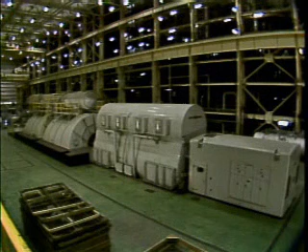This is the inside of a boiler furnace. Here, water in the tubes lining the walls of the furnace absorbs heat from burning fuel. The water is boiled, producing steam that drives a turbine and also provides heat for other systems in the plant.

Water circulation in a boiler is necessary for two reasons. First, it provides a constant supply of water to be turned into steam. And secondly, it carries the intense heat of the boiler furnace away from the boiler tubes, preventing the overheating and rupturing of the tubes. In a typical drum-type boiler, the water flow path includes an economizer, the boiler drum, downcomers, headers, and the boiler tubes.

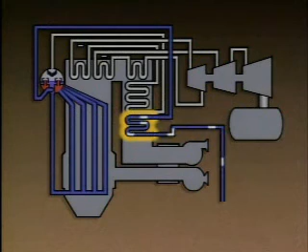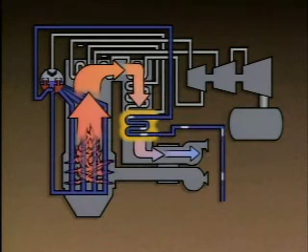The water that is supplied to a boiler is called feed water. The first component that the feed water passes through is the economizer. The economizer uses heat from combustion gases that would otherwise flow out of the stack to heat the feed water. Heating the feed water means that less fuel has to be burned in the furnace to convert the water into steam. In this boiler, the heated feed water flows from the economizer and enters the bottom part of the boiler drum through the feed water inlet.

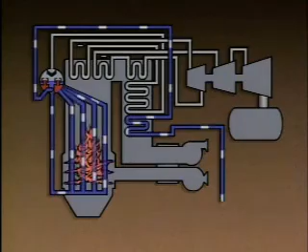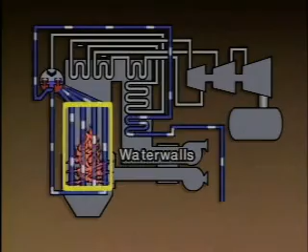The water continually circulates within the boiler through the downcomers, the lower headers, and the boiler tubes. A boiler typically has 2 or more downcomers and 2 or more headers. However, for clarity, this illustration shows only one of each. The lower headers supply water to the bottoms of the boiler tubes. The boiler tubes, which line the inside walls of the boiler furnace, are commonly called water walls. The water walls are exposed to the heat produced by burning fuel.

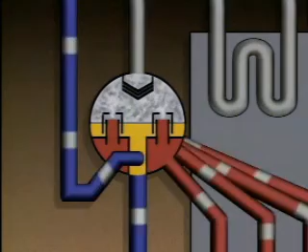As water flows up through the water walls, heat turns some of the water into steam. The mixture of water and steam rises until it enters the boiler drum, where it's separated into water and steam. The steam rises to the top of the drum, and the water remains in the bottom. The water is then available to recirculate through the boiler. The flow of water through some boilers occurs by means of natural circulation.

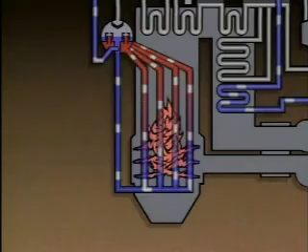The key to understanding natural circulation is the fact that cold water is heavier or denser than hot water or steam. In a boiler, the mixture of water and steam in the water walls is hotter than the water flowing from the drum through the downcomers. This is because the water walls are heated by the burning fuel in the boiler furnace. As the mixture of water and steam rises, cooler water from the downcomers flows into the lower headers and then into the water walls. The cooler water is also heated and rises, creating a self-sustaining flow through the water side of the boiler.

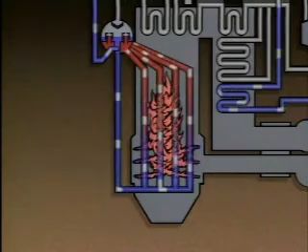Natural circulation of water in a boiler is affected by 2 factors. They are the amount of heat produced in the boiler furnace and the pressure at which the boiler operates. For example, raising the temperature in the boiler furnace increases natural water circulation because it results in a greater temperature difference between the water walls and the downcomers. Increasing the second factor, pressure, has a negative effect on natural circulation because as pressure increases, the density difference between water and steam decreases.

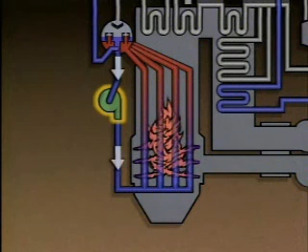In some boilers, boiler water circulation pumps are used to increase circulation. Circulation that uses pumps is often referred to as controlled circulation. The pumps force the cooler water from the drum through the downcomers, into the lower headers, and up through the water walls. The increase in flow over natural circulation provided by the pumps allows more heat to be absorbed by the water. As a result, controlled circulation boilers can produce more steam for a given size boiler.

A boiler drum has 2 main functions. It receives heated feed water to make up for water that's converted to steam and flows out of the boiler. It also collects the steam that's produced in the water walls. This is a simplified cutaway view of a typical boiler drum. The bottom part of the drum contains water to be circulated back through the boiler. The top part of the drum is used to collect steam. Heated feed water is fed into the drum through a distribution pipe. The drum is usually kept about half full of water.

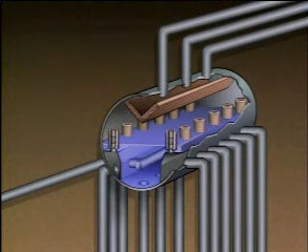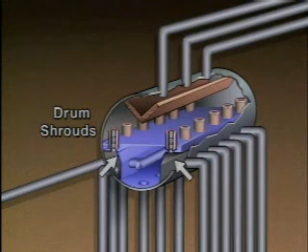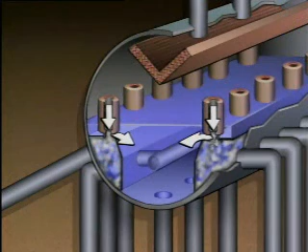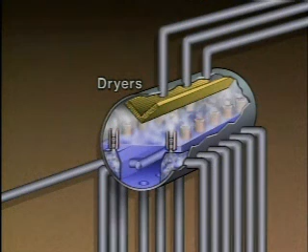In this example, the mixture of water and steam that returns to the drum from the water walls is directed against baffles called drum shrouds that run the length of the drum. The shrouds direct the mixture of water and steam into moisture separators, which are located at the top of the shrouds. The moisture separators separate the water from the steam. The water falls into the lower part of the drum, where it mixes with the feed water. The steam rises into the upper part of the drum. The steam could still have some water mixed in with it. So in this example, it is sent through dryers, which are located in the top of the drum. The dryers remove as much water as possible before the steam leaves the drum.

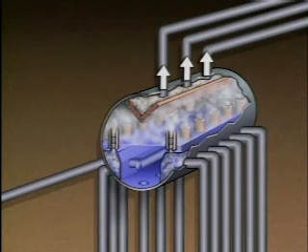This is important because water that flows out of the drum with the steam could damage downstream components. The steam is discharged from the drum through steam outlet pipes. Between the time that steam leaves the boiler drum and the time that it enters the condenser, it is acted on by components in the steam flow path.

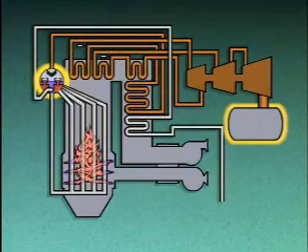To understand what these components do, you need a working knowledge of three basic concepts that are associated with the production and use of steam. They are boiling, saturation temperature, and superheat. Boiling is the process of converting water into steam. For any given pressure, there is a corresponding temperature at which water boils. The temperature at which water will boil at a given pressure is known as its saturation temperature.

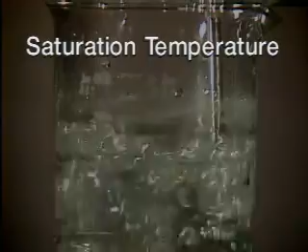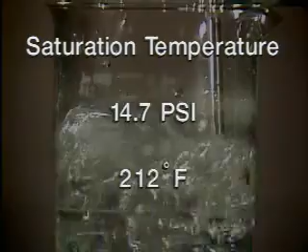As pressure increases, saturation temperature also increases. For example, at sea level, atmospheric pressure is 14.7 pounds per square inch. At that pressure, the saturation temperature of water is 212 degrees Fahrenheit. At a pressure of 1,000 pounds per square inch, the saturation temperature of water rises to 545 degrees Fahrenheit.

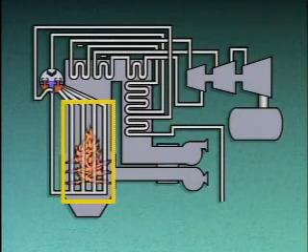When boiling occurs, as in this water wall, both water and steam are present and at saturation temperature. No matter how much heat is added to the boiler furnace, the temperature in the water walls will never rise above the saturation temperature as long as water is present. However, after all of the water has been removed from the steam, the temperature of the steam can be raised above the saturation temperature. Steam that has been heated above the saturation temperature is called superheated steam.

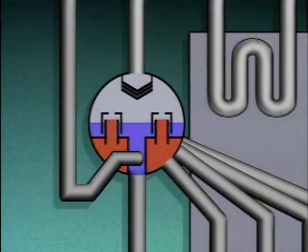Superheated steam is desirable because higher temperature steam can do more work in the turbine. Additional work from the same amount of steam production makes for a more efficient generating unit. The steam in the drum of a typical drum-type boiler is at its saturation temperature. As the steam leaves this drum, it passes through moisture separators and dryers, which remove water from the steam and thus prepare the steam for superheating.

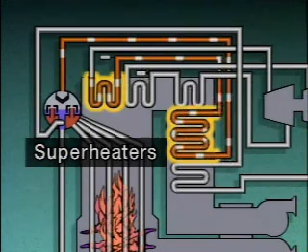Once the water is removed, the steam is sent to separate sets of boiler tubes called superheaters, where it is heated above its saturation temperature. The superheaters are positioned so that they are exposed to heat from combustion in the boiler furnace or from hot combustion gases. The superheater tubes absorb the heat and transfer it to the steam passing through them. There are several ways of classifying superheaters. For example, a superheater may be classified as a radiant superheater or a convection superheater.

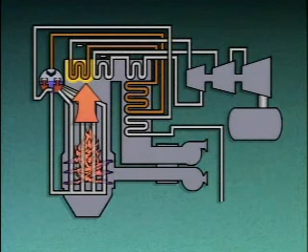A radiant superheater is in a direct line of sight with the flames in the boiler furnace, and it receives most of its heat by radiation from the flames. A superheater may also be classified as a primary superheater or a secondary superheater. A primary superheater is a superheater that the steam passes through first. It's usually a convection superheater, and it's generally in a cooler location than the secondary superheater. The primary superheater is designed to raise the temperature of steam from its saturation temperature to a specific temperature range.

The secondary superheater raises the temperature of the steam again. The secondary superheater is usually located closer to the boiler furnace so that it's exposed to higher temperatures. The secondary superheater may be either a convection superheater or, as in this case, a radiant superheater. This boiler has an attemperator, or desuperheater, located between the primary and secondary superheaters.

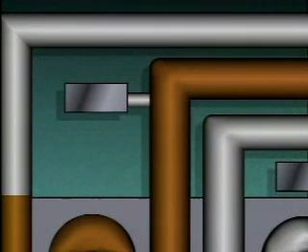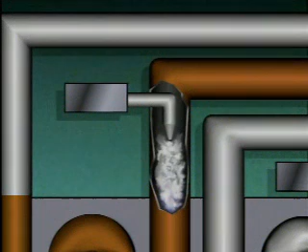The desuperheater keeps the steam from becoming so hot that it damages the superheater tubes. If the steam gets too hot, the desuperheater sprays water into the steam flow. This water immediately flashes to steam and mixes with the steam that's already there. The result is a decrease in the temperature of the superheated steam. From the secondary superheater, the steam goes to the high pressure or HP section of the turbine.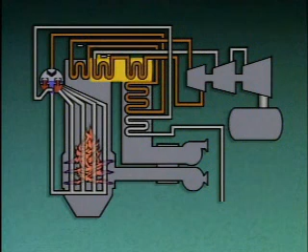As the steam flows through the HP section, it gives up a lot of its energy and its temperature and pressure drop. Before it moves on to the other sections of the turbine, the steam returns to the boiler where its temperature is increased as it flows through one or more reheaters. Reheaters are very similar to superheaters. They use heat from the boiler furnace or from hot combustion gases to raise the temperature of the steam.

For example, this boiler has a primary reheater that the steam enters first as it comes from the high pressure section of the turbine. After the steam flows through the primary reheater, it moves on to a secondary reheater. An attemperator, located at the beginning of the secondary reheater, is used to control the final temperature of the superheated steam leaving the secondary reheater. The attemperator sprays water into the steam flow if the steam gets too hot. The secondary reheater in this example can also be classified as a radiant reheater because it's located in a line of sight with the boiler flames and receives most of its heat by radiation from the flames.

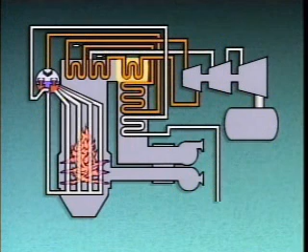The primary reheater is located farther from the flame, and it receives most of its heat by convection from the hot combustion gases, so it can be classified as a convection reheater. After it's reheated, the steam in this steam flow path flows to the intermediate pressure, or IP section of the turbine, and then through the low pressure, or LP section.

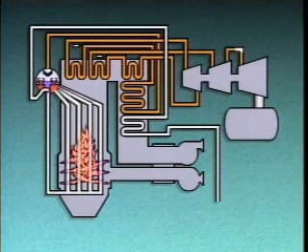From the low pressure section, the spent steam flows into the condenser. Inside the condenser, the steam flows over tubes that contain cooling water. The water in the tubes absorbs heat from the steam, and the steam condenses back into water. The water is collected in the bottom of the condenser and pumped back to the boiler to begin the cycle again.

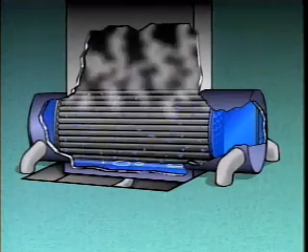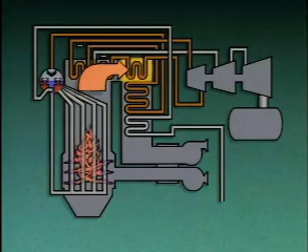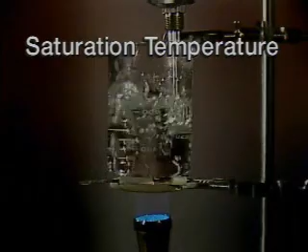At any given pressure, there is a corresponding temperature at which water will boil. This temperature is called the saturation temperature. For example, at standard atmospheric pressure, which is 14.7 psi, the saturation temperature of water is 212 degrees Fahrenheit. When pressure increases, as it does in this boiler, the saturation temperature also increases. At 1000 psi, the saturation temperature of water is 545 degrees Fahrenheit.

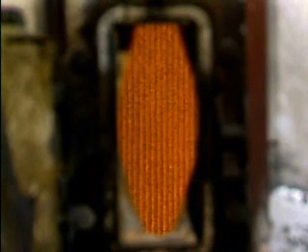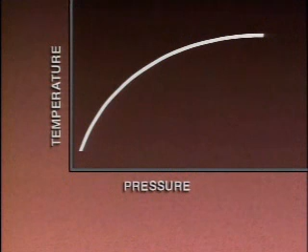When the saturation temperatures for water at different pressures are plotted on a temperature versus pressure chart, a line is formed showing the relationship between saturation temperature and pressure. However, this relationship only holds true up to a certain point. That point, which is called the critical point, is 705 degrees Fahrenheit and 3,206 psi. At or above the critical point, the densities of water and steam are the same. In other words, there is no distinguishable difference between water and steam.

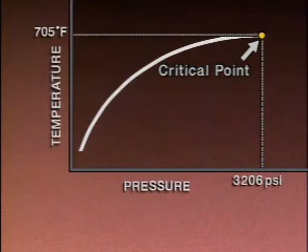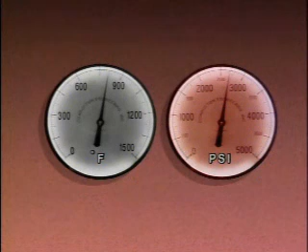When a boiler's temperature and pressure are above the critical point, all of the heat produced in the boiler can go toward raising the temperature of the steam. But boilers that operate below the critical point always have to use some of their heat to convert water into steam. So all boilers that operate below the critical point have a built-in inefficiency. Boilers that operate below the critical point are called subcritical boilers, while boilers that operate above the critical point are called supercritical boilers. A once-through boiler gets its name from the fact that water is pumped through it only once. It's not recirculated. Many once-through boilers are operated at supercritical conditions.

In a typical supercritical once-through boiler, boiler feed pumps force the feed water through a header at the bottom of the furnace and up through the water walls. As the water flows through the water walls, its temperature increases. The water in the water walls is already under a very high pressure, typically around 3,500 psi. That's well above critical point pressure. When the temperature rises above the critical point temperature, water becomes indistinguishable from steam. The section of the water walls where this happens is called the transition zone.

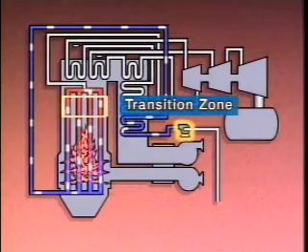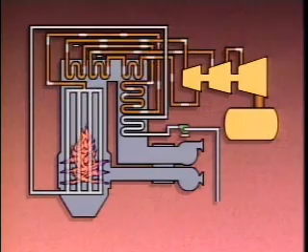There is no need for a drum, moisture separators, dryers, or a recirculation system, because once the flow is passed through the transition zone, there is no water left to recirculate. The steam that leaves the transition zone moves on to the components in the boiler's steam flow path. The components in the steam flow path are generally the same for supercritical boilers and subcritical boilers.

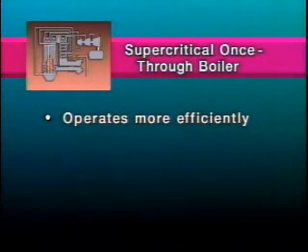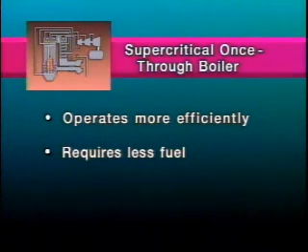The main advantage of a supercritical once-through boiler is that it operates more efficiently than a subcritical boiler that has to recirculate water in the process of producing steam. A supercritical once-through boiler requires less fuel than a drum-type boiler of the same size to produce the same amount of steam. That makes a supercritical boiler less expensive to operate. However, while supercritical once-through boilers tend to be cheaper to operate, they're more expensive to build and maintain since special materials are needed to withstand supercritical temperatures and pressures.

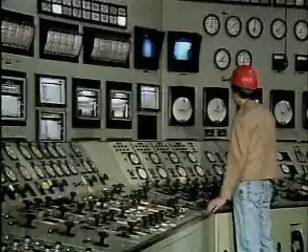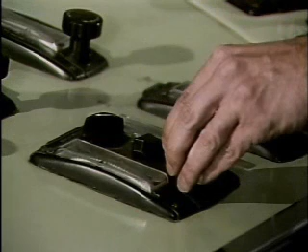As an operator, you'll be responsible for maintaining the correct steam pressure in your boiler. To do this, you need to know some of the factors that affect boiler steam pressure. In a drum-type boiler, steam pressure depends primarily on firing rate. Assuming the demand for steam doesn't change, you have to maintain a constant firing rate to maintain a constant pressure. If you reduce the firing rate in the boiler furnace, the boiler will produce less steam and steam pressure will decrease.

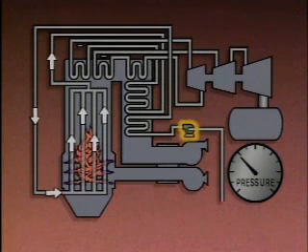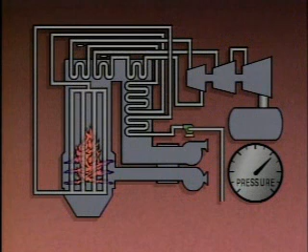If you increase the firing rate in the boiler furnace, more steam will be produced and steam pressure will increase. In a once-through boiler, the heat produced in the furnace has little effect on steam pressure. That's because the pressure in this type of boiler is controlled primarily by the boiler feed pumps. If the pressure produced by the boiler feed pumps is reduced, the steam pressure will decrease. If the pressure produced by the boiler feed pumps is increased, the steam pressure will increase. Lowering the firing rate in the furnace of a once-through boiler will only cause the temperature in the water walls to drop. Pressure is not significantly affected.